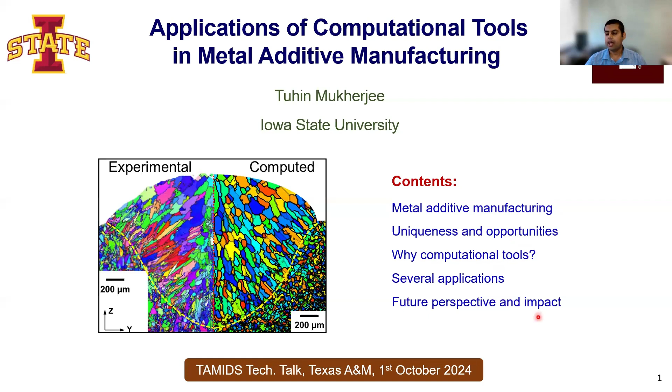Then what is the problem that we are going to talk about today? The main problem is, if you are from metallurgy, you know that there are over 5,000 commercial metallic alloys. And how many of them can we print today? You can probably count with both of your hands. That few. And why is that so? That is because we are still unable to properly control microstructure, mechanical properties, and defects of additive manufacturing parts.

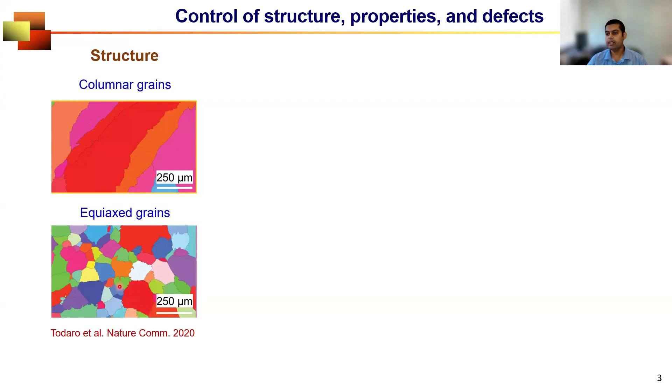So you see that depending on how you are printing, your microstructure looks different, and that will result in very different mechanical properties. In the same part, depending on the location inside the part, the mechanical property can significantly vary. For example, you see that with the distance from the top of the deposit, the hardness varies significantly, and that is also attributed to the difference in the microstructure. And finally, a wide variety of defects, starting from lack of fusion voids, porosity, cracking, surface roughness, distortion, and so forth. All of these can significantly degrade the mechanical properties, serviceability, performance, and reliability of the part.

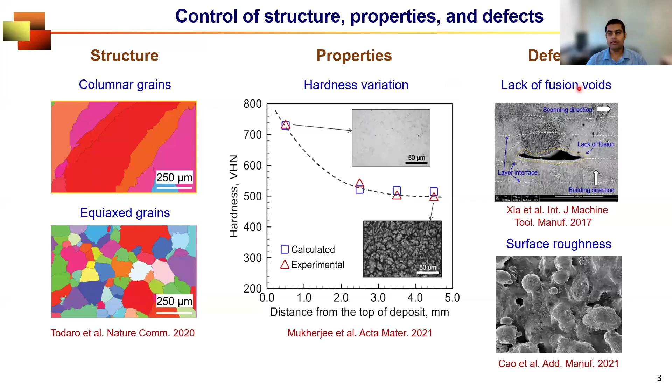And when we spend a lot of money in 3D printing a part by using $1 million expensive equipment, then we do care about our part. We don't want to print and throw that part away. So that's why controlling all of these things are really, really important. And that's where the computational tools can help us. Let me give you a quick example.

If you do metal 3D printing, these are the variables that you can adjust. Like for example, power, speed, laser beam radius, layer thickness, and there are many variables that are process conditions or properties of materials. Now, there are 12 in this list, and if you use a very simple two-factor design of experiment, the minimum number of experiments that you need to fully capture the effects of all these variables is 2 to the power 12, which is 4096 experiments.

Now, if you do 3D printing, you know how challenging 3D printing experiments are. So let's assume that you do one successful experiment a day. A PhD student cannot graduate in 10 years. So that's the issue.

And if you just take two process parameters, laser power and scanning speed, you see for the same material, the power and scanning speed vary depending on which additive manufacturing process you are using. Please note that both of them are plotted in log scale. So that means you need to explore such a wide range of processing conditions to be able to fully explore the effect of processing conditions and to understand and correlate those with microstructure, properties, and defect formation.

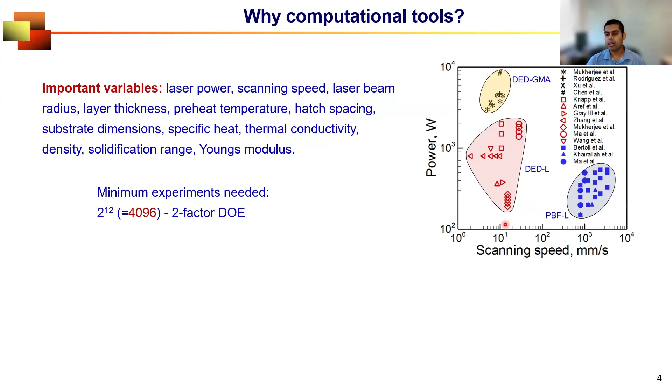To do so, we can take advantage of computational tools that can virtually test this process parameter window and reduce the parameter space for experiment. So it can tell what works and what does not work so that you don't waste material and energy and time in doing experiments that are not fruitful. In other words, it will minimize trial and error, improve quality, and at the end, reduce money.

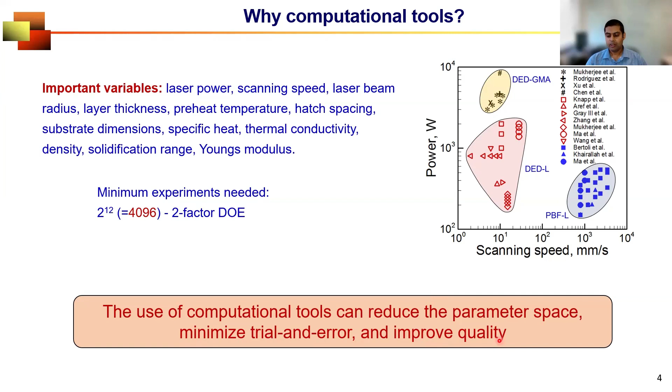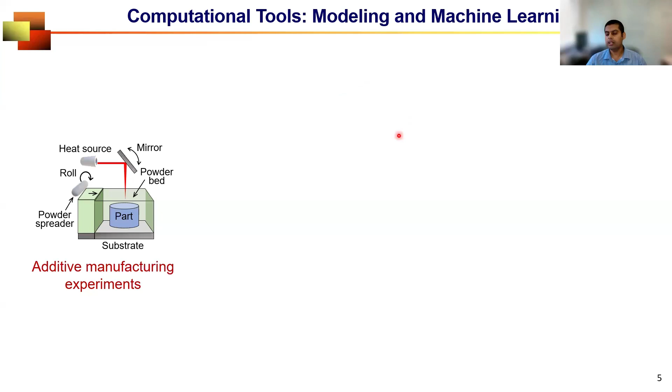So what do I mean by computational tool? It can include multiphysics modeling as well as AI tools such as machine learning and deep learning. So how do they help? Mechanistic modeling calculates the variables that affect the three things that I was talking about by providing scientific insights. And it can guide experiments by providing the appropriate conditions for which we, let's say, get a defect-free part with appropriate microstructure and properties.

But development of these models depends on proper understanding of the science behind the additive manufacturing process. Now, you know, additive manufacturing is a rapidly emerging process, and for many cases, we do not understand the physics completely. Then what we do, we take advantage of the wealth of data that we generate every time we run the model or every time we do the experiment and synthesize those using machine learning to obtain understanding that we cannot obtain

from mechanistic modeling. And these days, machine learning algorithms or deep learning algorithms have been improved so much that they can provide reliable prediction with less data. And most importantly, since we are talking about a multivariable problem, machine learning can also guide us to understand which variable is less important, which variable is more important, so that engineers can know which variable to control to be able to tune microstructure, properties, and defects.

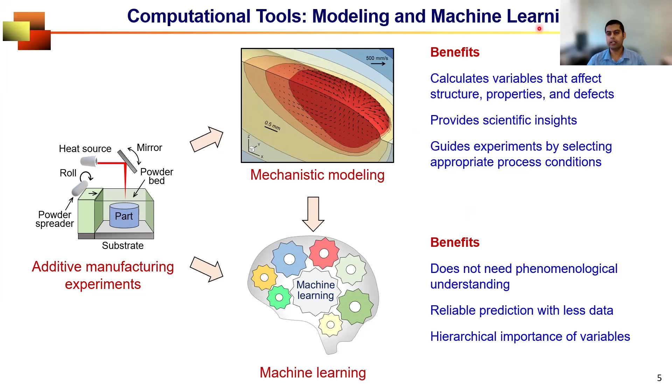So at Iowa State, we do a wide variety of things in both the domains, modeling and machine learning. So let's start talking about the modeling. The most primitive model that we do is the reduced order analytical model. It has a lot of approximations to accelerate the computational speed, but it can give us essential information on which microstructure, property, and defect depend on, like for example, the temperature distribution or the dimensions of the molten region.

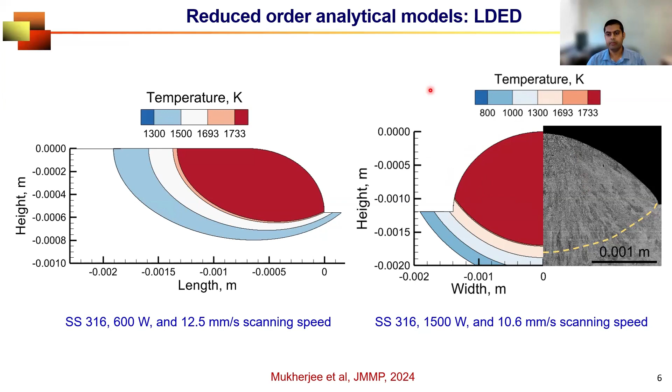This is an example of laser directed energy deposition additive manufacturing, where you see a very primitive reduced order analytical model can more or less predict the molten pool or deposit dimensions within acceptable limit. For laser powder bed fusion, and this is from a recently published paper with my student, you can see that they can capture not only the effect of process and process conditions, but the differences in the materials.

So A, B, C, and D are for 4 different materials: stainless steel, titanium alloy, nickel alloy, and aluminum alloy. And you see, depending on the differences in their thermophysical properties like density, thermal conductivity, specific heat, and so forth, they exhibit very different looking molten pool. And the temperature inside the molten pool is also quite different.

So the advantage of these types of analytical models is that they can not only provide useful insight into this process, but can also be used for comparing different alloys in terms of their fusion zone geometry, cooling rate, evolution of microstructure, susceptibility to defects, printability, and so on and so forth.

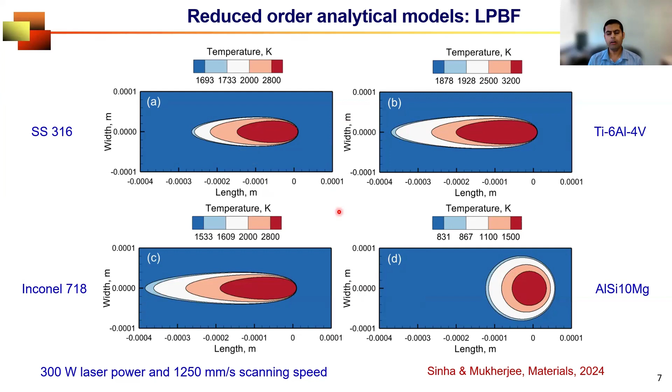Now, if we add a little more complexity and develop numerical models, why? When we need more in-depth knowledge about the additive manufacturing process. For example, when we create a molten region, how does that molten metal flow inside that region? Depending on the temperature difference, there will be differences in density and differences in surface tension. All of those drive the convective flow inside the molten region.

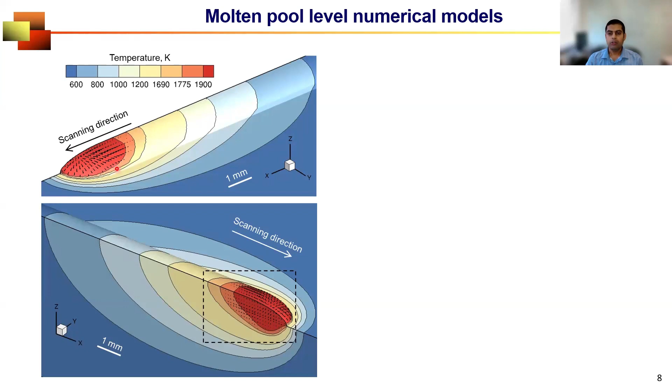And this convective flow not only affects the dimension of the molten region, but also the temperature in the nearby region, and thus the evolution of microstructure. So this type of in-depth numerical model can provide us a very detailed picture of what's happening during the additive manufacturing process. If you look at the scale bar, this is 0.5 millimeter, which means this is something like 5 millimeter long. So whatever is happening is within a very small, tiny domain. We are capturing detailed physics within that tiny domain.

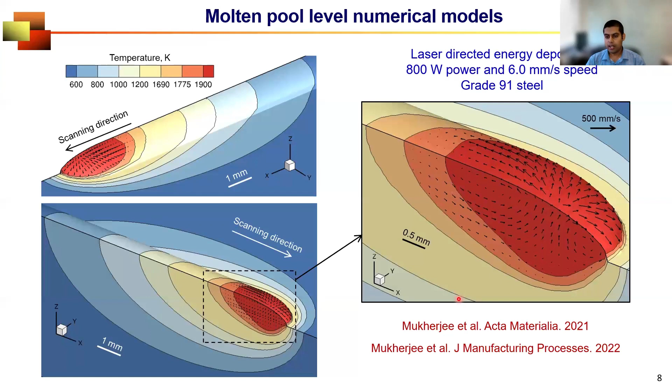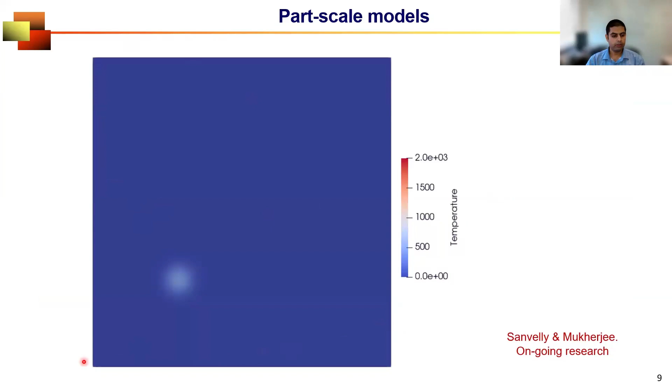Now we know that we make additive manufacturing parts by depositing many layers and many hatches, thousands of layers and hatches. So what if we want to simulate the entire part? That's often very difficult with such an in-depth model, so we develop part scale models that do not consider so much of what's happening inside the molten pool, but are much more interested in looking at the entire picture. Let me play this animation and you will understand what I'm saying.

For example, the laser beam in laser powder bed fusion is moving in a zigzag pattern. And this model is successfully capturing the variation in the temperature field happening across the entire part. So for the entire part, depending on where we are looking, we can accurately predict the temperature fields and their spatiotemporal variations.

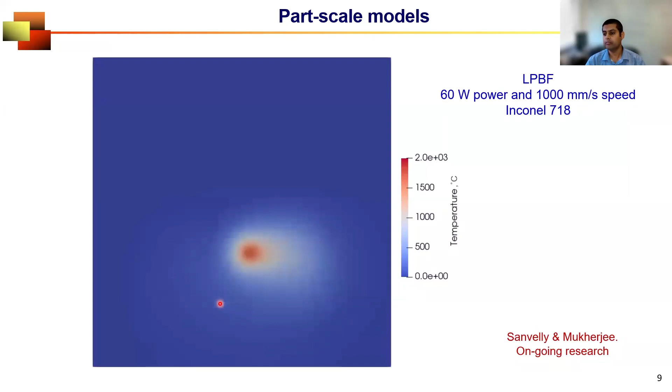This is an example of a stainless steel part made by laser directed energy deposition additive manufacturing, where the part is 40 millimeter in length and 10 millimeter in width. This part is made by thousands of layers, and there is no finite element or finite volume model that can model the deposition of the entire part. It's not possible. So that's why we need to use part scale models that are based on several approximations, but can give you the temperature fields and other essential information within a realistic acceptable limit.

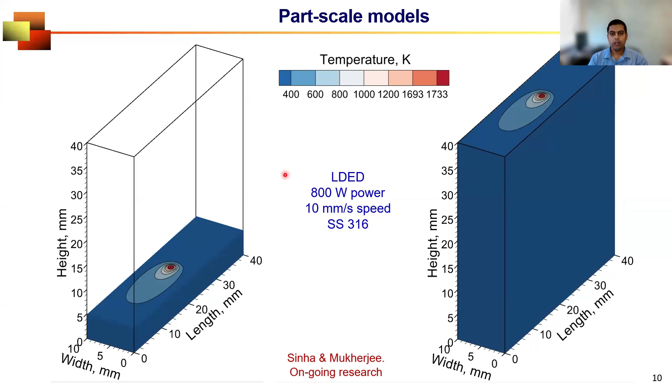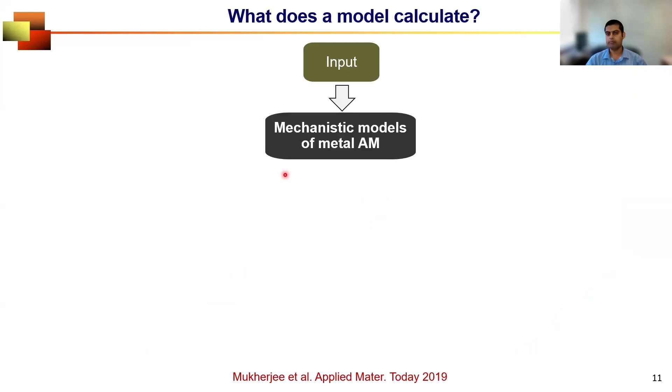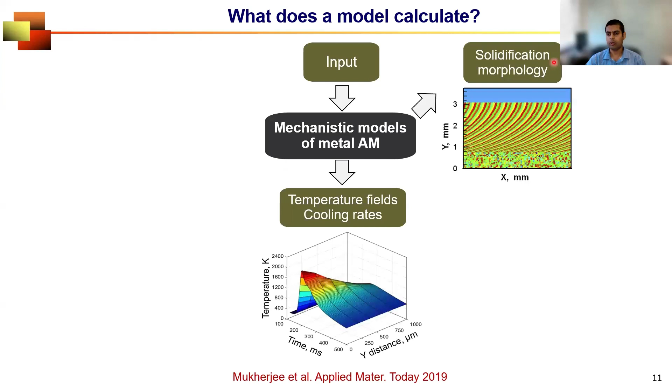So from the part scale model, if we go forward, whether this is a reduced order model, a more in-depth numerical model, or a part scale model, the main objective is to get the temperature fields and cooling rates. Once we know those, we can take advantage of that information and get solidification morphology, whether columnar grains or equiaxed grains that I was talking about, or a complete 3D grain structure, giving not only the grain size but its distribution in 3 dimensions, and also residual stresses and a wide variety of defects. This is the overall objective and the main mantra of developing a wide variety of mechanistic models for additive manufacturing processes.

Now, at the same time, if we look at where machine learning can help in additive manufacturing, to me there are two types. Like all other machine learning applications, we can classify all the problems we want to address into two classes: regression problems and classification problems. Under regression problems, the examples are control of geometry, whether we are making a larger or smaller molten region, whether the grain size is big or small because it affects properties, how much residual stress we are accumulating, and the amount of distortion in those parts. Those are regression problems where we talk about the particular value of a variable.

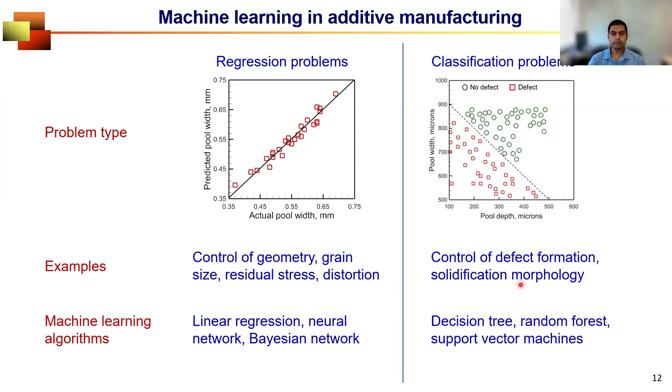So now, in subsequent slides, I'm going to give you 7 examples of the use of modeling and machine learning in additive manufacturing that we are doing at Iowa State. This example is very close to my heart, and the picture that you are seeing is actually in the building where I'm sitting in my lab. We have a wire arc additive manufacturing system, and that is controlled by a cobot or a collaborative robot.

What is the advantage and what are we doing? I'm coming to that in a minute. But what it does is it deposits material in the form of wire, which is melted by a high energy electric arc. Just like this, the electric arc is melting the metallic wire, and that is being deposited layer by layer and making the part in 3D. So this is my student wearing all the PPEs, observing very closely what's happening in real time.

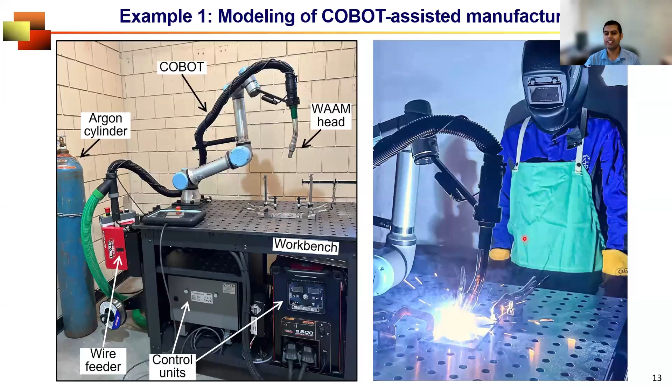So a collaborative robot or cobot is much better than a traditional robot in many cases. For example, it reduces the need for path programming, enhances the safety of human interaction, and improves user friendliness and productivity. And because of these, it's particularly useful for additive manufacturing. As my student is doing, you do not need to program this robot explicitly. Instead, you can teach this robot a path along which you want to deposit the material by selecting a few important coordinates. And then the robot itself will identify the deposition path and 3D print the entire part.

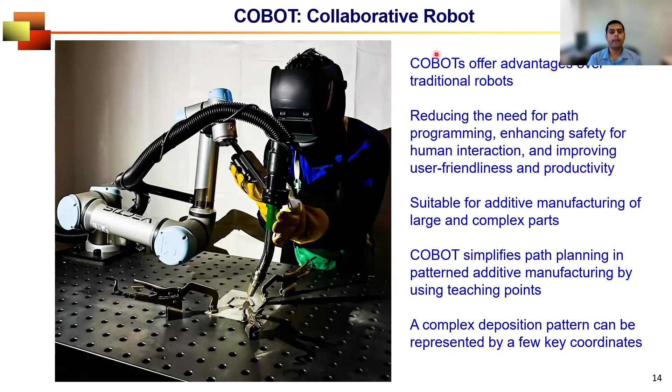So here we model the additive manufacturing process using a collaborative robot. I can give you one quick example here. We deposit the material following a hexagonal pattern, and the cobot needs to be programmed just based on the 6 vertices of this hexagon. And you can see the corresponding temperature calculation using a part scale model, the deformation calculation, and stress calculation, all using a part scale model, because here we are talking about a large length scale. And you can see that the part scale model can give you the essence of the process itself, where the stresses are accumulating the most, how the part is distorting in 3D, all those detailed information.

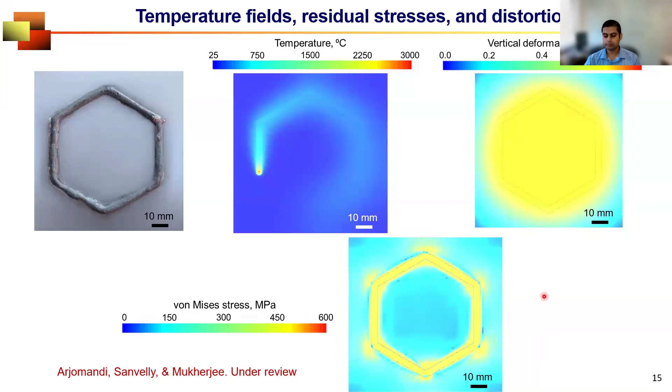The second example that I have is consistent with one of our objectives, structure, property, and defects. It's on controlling grain structure. If we go back to our metallurgy class, we are taught that during solidification of an alloy, there is a two-phase region, a solid-liquid region. So when the liquid is being solidified, not all liquid instantaneously becomes solid. There is a two-phase region, liquid and solid. If you plot the temperature in that region, you will see there are two things. One is the actual liquidus line, and the other one is the equilibrium liquidus line. And the difference between these two is called supercooling. For any solidification process to happen, there has to be a supercooling that will drive the solidification process.

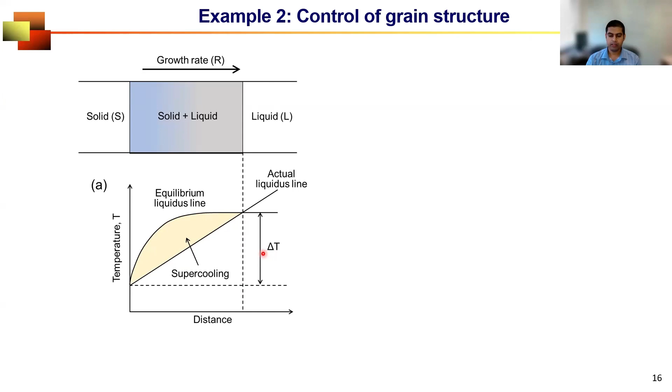This temperature difference is very important, because this temperature difference divided by distance, which is called temperature gradient, represents whether we will form columnar grains or equiaxed grains. So this is a very well-known plot from metallurgy books, where people plot this temperature gradient, which is nothing but temperature difference divided by the distance, the slope of this line, with respect to growth rate. Growth rate means how fast this solidification front is moving, the rate of solidification. Depending on the slope of this plot, you can identify how the solidification morphology will look. Whether this is planar, cellular, or, as we have talked about, columnar and equiaxed, you can very easily find out.

What you need to do is just calculate the temperature distribution that I showed you how to calculate. Once you do that, you get the temperature gradient and growth rate and readily find out your solidification morphology. Second advantage, you see along this hyperbolic line, G times R, which is temperature gradient times growth rate, is constant. And that value gives you the size of the grain. This product is called cooling rate, and that is directly connected to the size of the morphology. Now, let me give you examples of both of these.

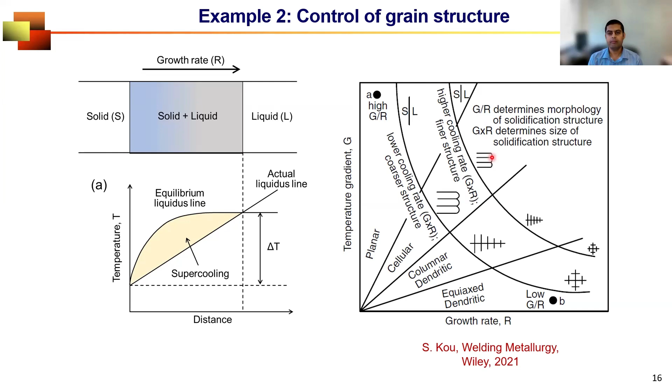Here we have used a model to calculate the G by R ratio for an aluminum alloy, a 6000 series aluminum alloy. The calculation is showing us that this G by R ratio, which is the slope of the previous plot, is varying spatially like this. For this material, there is a critical G by R value that determines whether it will form columnar grains or equiaxed grains.

For example, if the G by R ratio is more than 9, it will form columnar grains. If it is less than 9, it will form equiaxed grains. This is the computed value of G by R. In this region, the value is less than 9, and equiaxed grains should form, which is proven here from the model as well as from the experiment. Beyond which, the value is more than 9, that means columnar grain. You see long columnar grains being formed, which is also evident from the experiment.

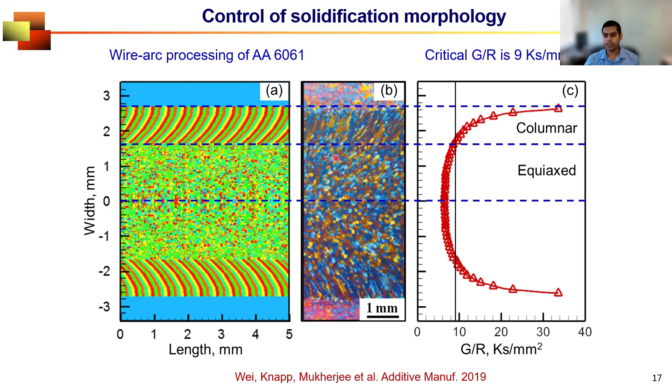So this is a very good example of how you can take advantage of temperature calculation, process it, and get useful scientific insight to be able to predict microstructure. So this is about the morphology. The next thing is about the size.

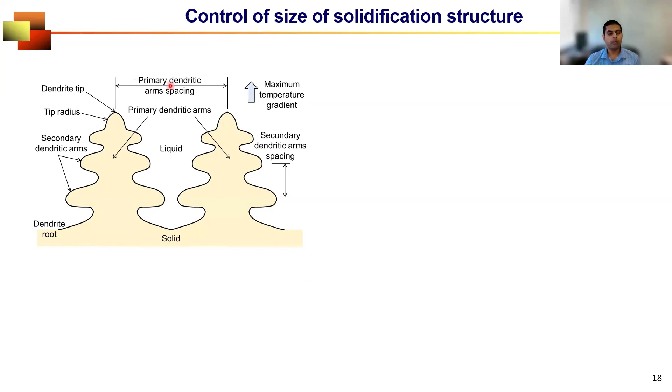Now, if I go back once again to our phase transformation class, we often talk about primary dendrites and secondary dendrites. For non-metallurgists, they look like Christmas trees, but that's how solidification happens. The distance between two consecutive primary dendrite arms or two consecutive secondary dendrite arms significantly contributes to the mechanical properties of the part. So we need to somehow predict these values. How can we do that?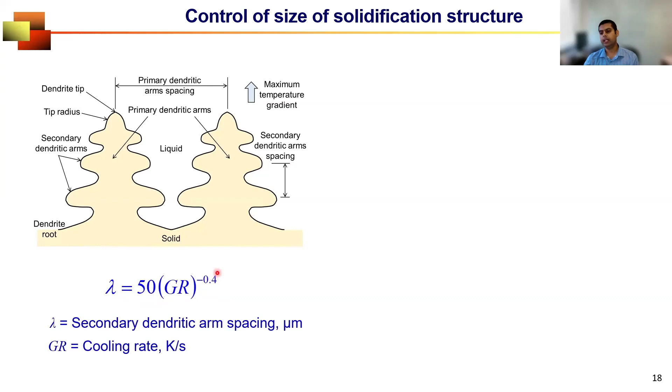Easy. From the previous calculation, we find out G times R, which is the cooling rate. And from solidification literature, like Merton Flemings' very famous solidification book, this formula comes from there. Secondary dendritic arm spacing, which is this distance, is related to the cooling rate using this formula. Now 50 and 0.4 are alloy-specific constants. For steel, this is 50 and 0.4. If you are taking aluminum alloy or nickel alloy, they might be different.

So once you have these and calculate the cooling rate from the temperature field, you can calculate secondary dendritic arm spacing. And you see here for different laser powers, I show how we can calculate the secondary dendritic arm spacing that matches with the experiment. For low power, you see smaller dendrites, and for high power, you see larger dendrites, which is very consistent with the calculated results.

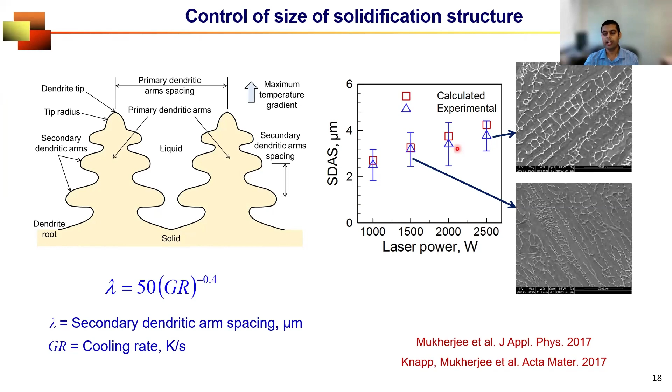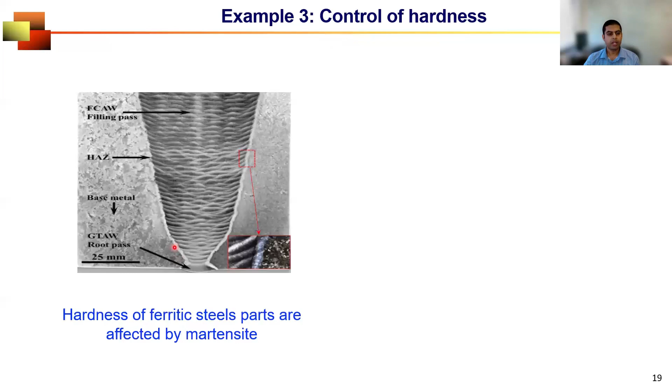So now, since we have talked about the microstructure, the next example that I selected is for controlling one of the very primitive mechanical properties, which is hardness. And the example is for a ferritic steel whose hardness is affected by martensite. Often we weld or additively manufacture this type of part by using multiple tracks. Here we are talking about a ferritic steel grade 91 that is used in the nuclear power industry.

But there is a small catch. We make additive manufacturing parts by depositing many layers. That means the layers that are already deposited will undergo repeated heating and cooling. And that repeated heating and cooling changes some of the martensite to tempered martensite. Hardness of tempered martensite is less than martensite. So depending on how many times it gets reheated and cooled, the extent of tempered martensite formation will depend on that, and hardness will accordingly change.

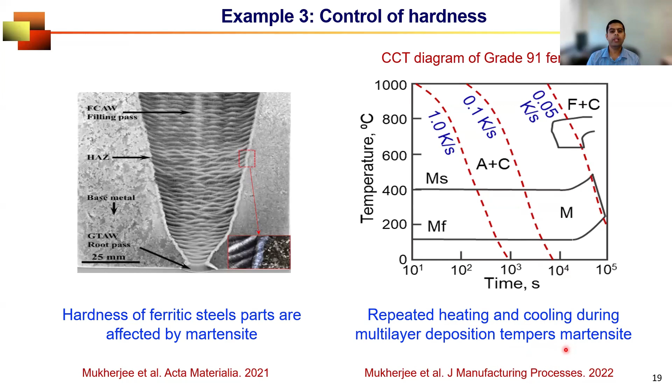So how to model that? What we did, we used the isothermal aging data. Now, for a complex material system like grade 91, it's very difficult to get reliable data on isothermal aging. So we collected a lot of data from the literature and then used those data to train a neural network, and then used that neural network to generate a lot of tempering data for different time and temperature combinations. Once we have that, we get the constants in the Johnson-Mehl-Avrami equation.

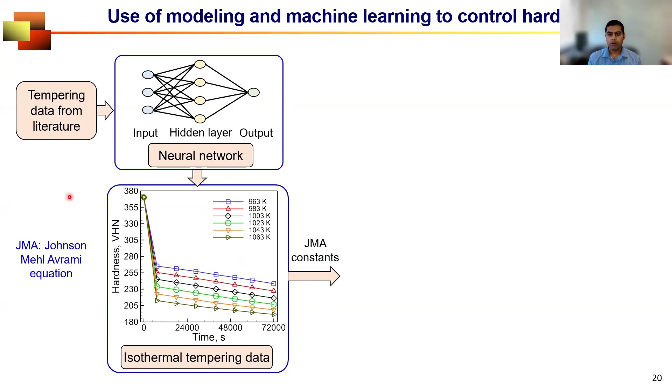What's this equation? If you don't know, it's a very famous equation for capturing isothermal phase transformation. On the other hand, the model that I was talking about can give you the temperature variations with time, multiple thermal cycles, repeated heating and cooling due to deposition of multiple layers and tracks. Now, the JMA equation is an isothermal phase transformation equation.

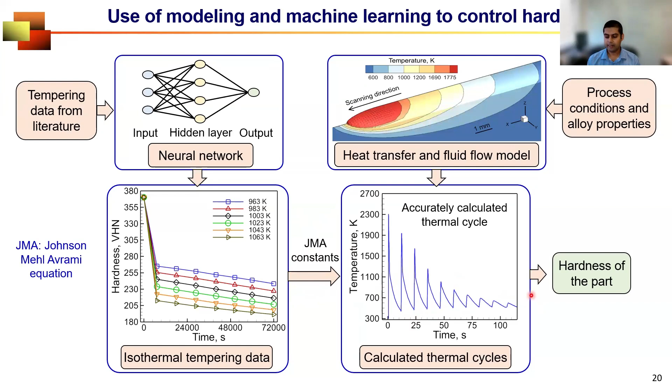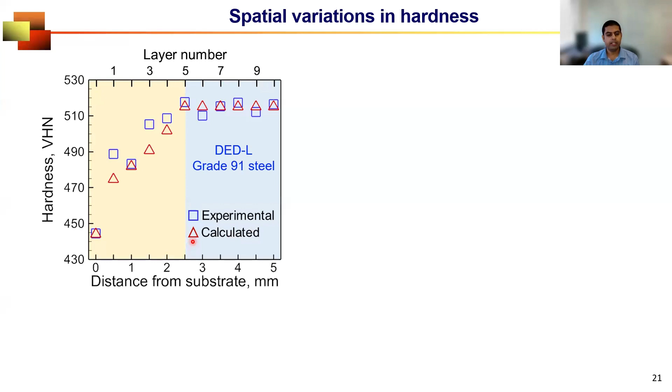What's happening in the top region? The peak temperature never goes below the AC1 temperature. So the martensite that forms here will transform again back to austenite. So this martensite will never transform into tempered martensite. That's why the hardness in this region is controlled by the absolute amount of martensite, not tempered martensite. Okay, so a very complex metallurgical phenomenon we are trying to capture by using this kind of process model.

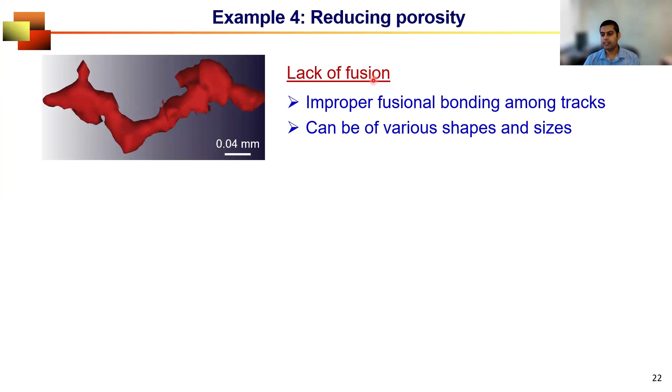So the fourth example. After structure and mechanical property, now we are going to the defects, and examples 4, 5, 6, and 7 will be focusing on defects, different types of defects. So the first one is reducing porosity. Now there are 3 different types of porosities that we encounter during the additive manufacturing process. First one is lack of fusion. What do I mean by that? We deposit multiple tracks. What if they do not properly fuse with each other? And that will end up creating a lack of fusion defect.

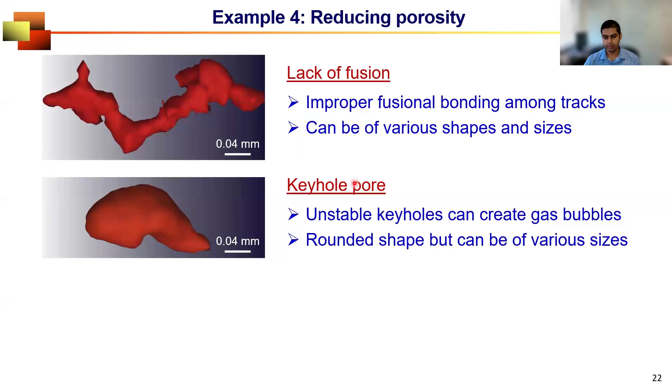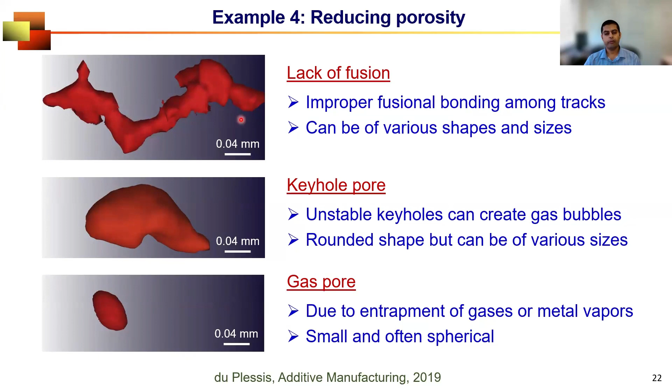Second, often we perform additive manufacturing in keyhole mode. What do I mean by that? The energy density is so high that it forms a vapor cavity during the process. And if that vapor cavity or keyhole is unstable, that will break and generate a lot of gas bubbles that will end up creating porosities. And the third one is gas porosity, where the shielding gas or metal vapor is trapped within the molten region and creates porosity. You can see they vary widely in terms of their shape, size, and morphology. So here I'm going to talk about lack of fusion and gas porosity.

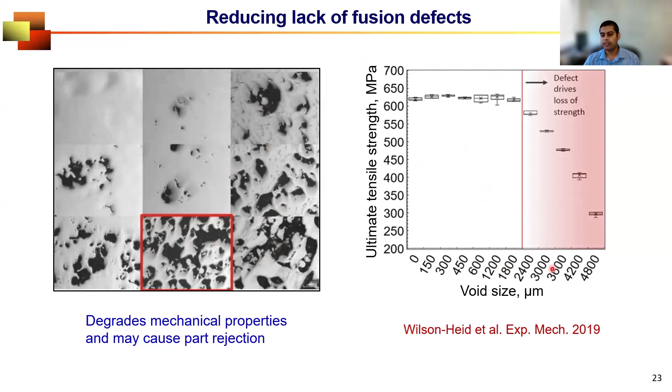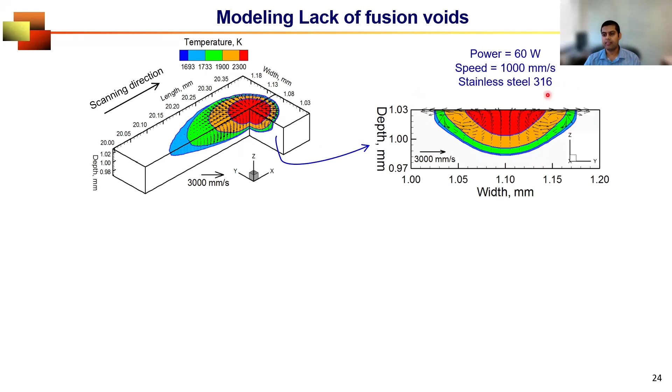So like all three types of porosity defects, lack of fusion defect, which is represented by improper fusion among tracks, significantly deteriorates the mechanical properties. As you can see, the ultimate tensile strength decreases very rapidly with the size of the void. So how do we model those? This is a typical example of the molten region, or the track. Now, if you see the transverse section of the molten region, it looks like half of a watermelon. And that is the transverse view of one particular track in additive manufacturing. Now we make a part with many such tracks, and it should look like this, where those small watermelons are just like this, a collection of many watermelons.

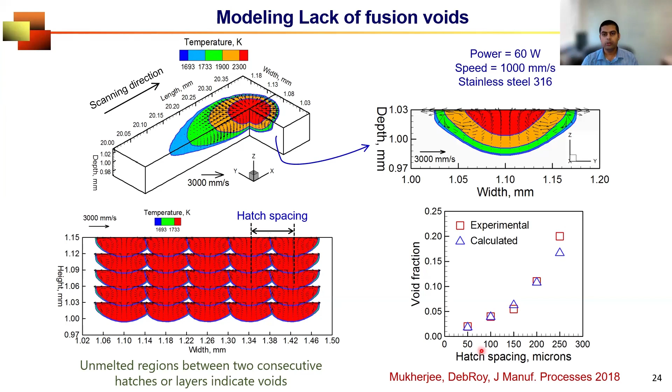So what do I mean by lack of fusion void? Lack of fusion voids are this white region, where two consecutive molten pools are not properly fused together and creating an empty region. How can you minimize this? One way to minimize is bringing them close. And that distance is called hatch spacing. That means if you reduce the hatch spacing, you should reduce the lack of fusion void, which is very consistent with the experiment. You see, void fraction is significantly less at a low hatch spacing. So like hatch spacing, there are many other variables that contribute towards lack of fusion void. And some of those are here in this list. Like hatch spacing, I have talked about. Pool size, also very important.

Marangoni number talks about the fluid flow inside the molten pool and peak temperature inside the molten pool, and Fourier's number indicates the heat transfer in the additive manufacturing process. Now, if you have all these variables calculated using an additive manufacturing model, we can even get a linear

regression model and propose an index that can delineate between the porosity cases and cases where the porosity is very less. So that's the advantage of combining modeling and machine learning, to identify very important scientific insights to be able to solve such a complex problem like porosity defect in additive manufacturing.

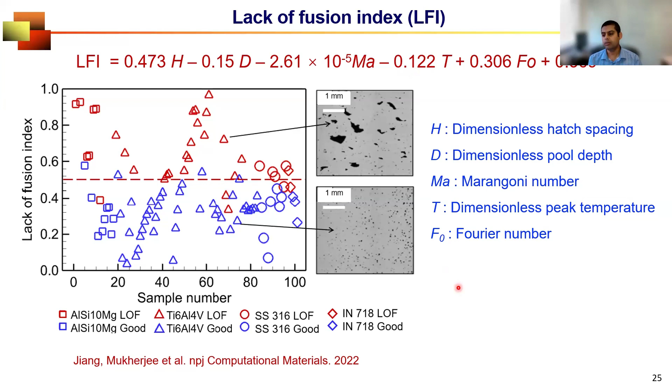Now, before it can rise up and escape from the molten pool, if the molten pool solidifies, then the bubble will be trapped and cause porosity. So the time it takes to rise up, time to rise, and the time the molten pool takes to solidify, both are important. If time to rise is significantly higher than the time to solidify, then definitely you are going to form porosity. So what we did,

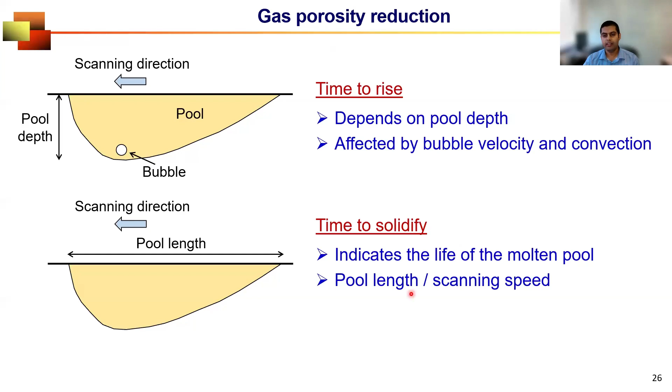we tried to calculate these two times in additive manufacturing and come up with their ratio and propose a dimensionless index. What we found, depending on the index, we can classify the cases where we see porosities and the cases where we do not see porosity. We have about 100 experimental cases for 4 different commonly used materials, and these 100 data points are collected from the literature, different papers that are available.

And we see that no matter what process parameters we are using, at the end, a simple time ratio can delineate the defect-free cases from the defective cases. And when we have defects, the index is also useful to represent the density, or 1 minus porosity, very accurately. So here, this is another great example where a simple temperature field and molten pool dimension calculation can give you very important insight to solve very important problems.

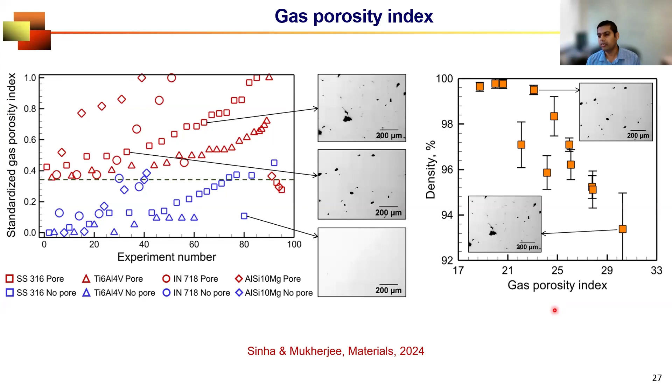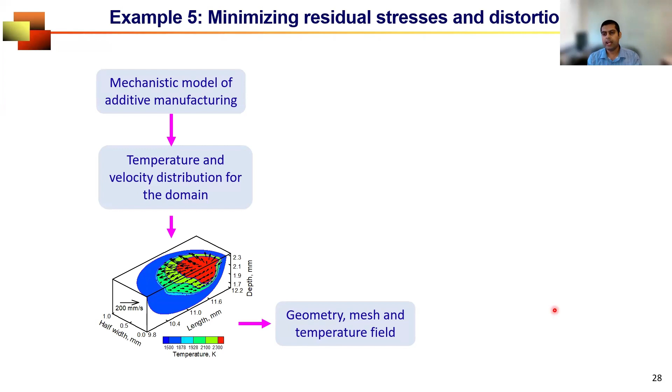Okay, the next example is minimizing residual stress and distortion. I think probably residual stress and distortion are the two most important problems in additive manufacturing, because we try to print dimensionally accurate complex parts, and we don't want our part to distort. So what we did, we start from temperature field calculation, and then take that temperature field along with the geometry and mesh to a finite element based mechanical model, and calculate residual stress and distortion.

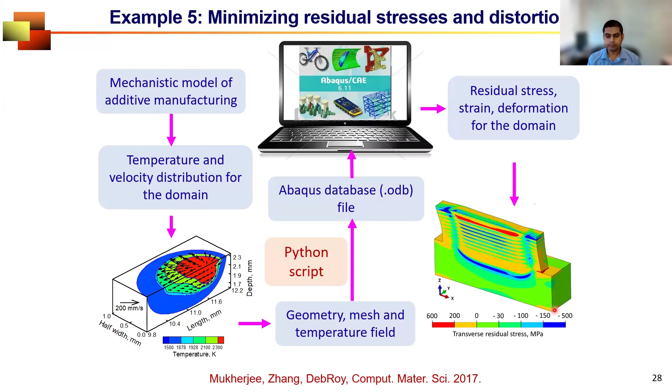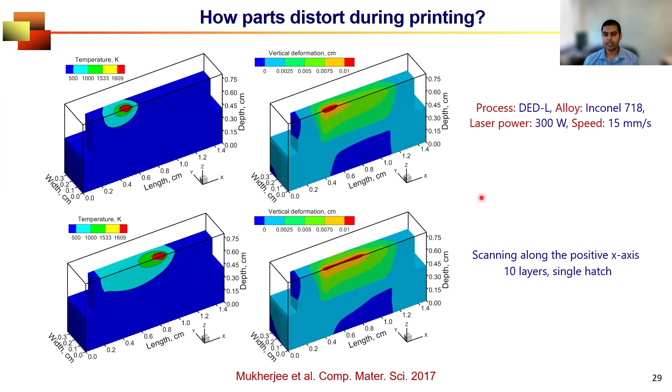So that type of modeling framework is enormously useful to provide scientific insights. For example, you see how the distortion or deformation field is evolving depending on the temperature. This is the temperature field, and this is the deformation field. You see, where the temperature is very high, the deformation is also high. Why? This is alpha delta T, high school physics. As the molten pool is progressing, this deformation field is also getting elongated. So this information is very useful to find out how much deformation you can get in the final part, and whether this is exceeding the allowable design limit.

Similarly, for residual stress, we can get the spatial distribution of residual stresses, like how the high residual stresses that are accumulated after the deposition of the second layer are partially alleviated when you deposit a subsequent layer and reheat and recool it, and how residual stress is spatially so non-uniform, causing delamination, cracking, and many other problems in additive manufacturing, and how a numerical model can capture all of those elements and guide engineers to overcome all these problems.

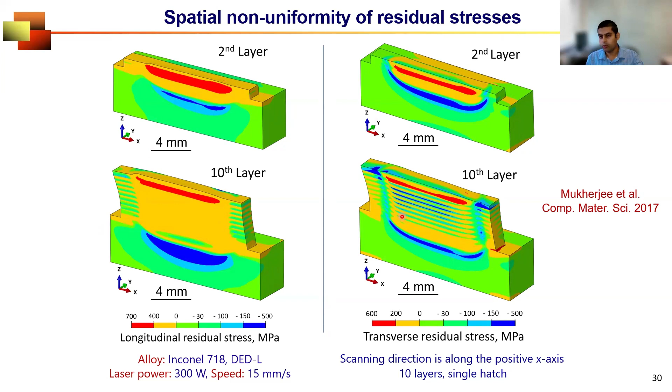Now, going back to one of the primary advantages of using machine learning, that was to identify the relative importance of important variables. What we did, we identified 5 physical factors that control or affect residual stress formation. And we created a database of 243 data points for 3 very commonly used alloys.

What we found, delta T, which is nothing but the difference between solidus and preheat temperature, is the most important variable controlling residual stress. If we go back to welding literature 40 or 50 years ago, we will see that in the welding industry, it's very common to preheat the welding plate before welding.

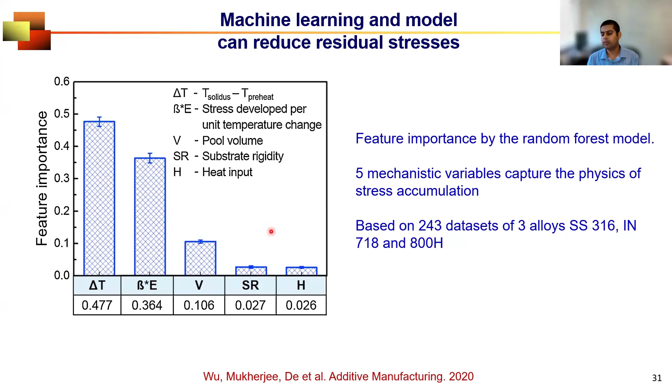What they are doing, they are increasing this T preheat to be able to minimize delta T, to minimize residual stress. So you see that using modeling result, then teaching machine learning algorithms using those modeling result, we are finding out science that are there in the welding industry for a long time. That means these computational tools are enormously advantageous to be able to give you those insights that are already proven for a long time in various industries, but at the same time, discovering new science moving forward and helping us to be able to solve important problems in metal additive manufacturing.

Sixth example. So when we do additive manufacturing, we are here talking about a high temperature process. Just imagine the molten region as your coffee cup. Water vapors, water molecules evaporate from the top surface of the coffee cup. Similar thing happens for a molten pool. The alloying elements vaporize from the molten region, and at the end, the chemical composition of the part is significantly different from the material you started with.

So this paper just became online yesterday in NPJ Computational Materials. So what we did, once again, we started from very basic temperature calculation. And then we know the vapor pressure versus temperature relation, and this is a material property. For different elements, we see different plots. It does not depend on whether additive manufacturing or welding, it's a material property. So based on this relation and calculated temperature field, we get vapor pressure distribution.

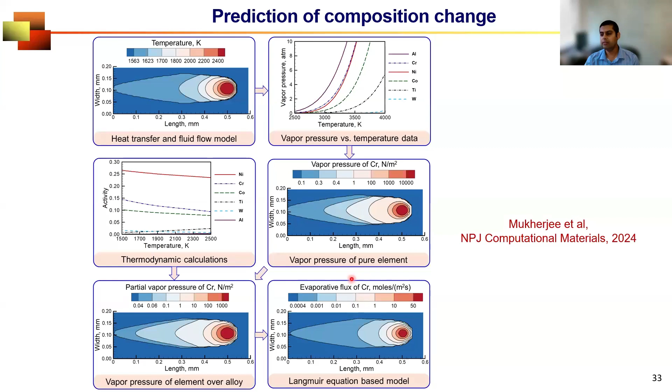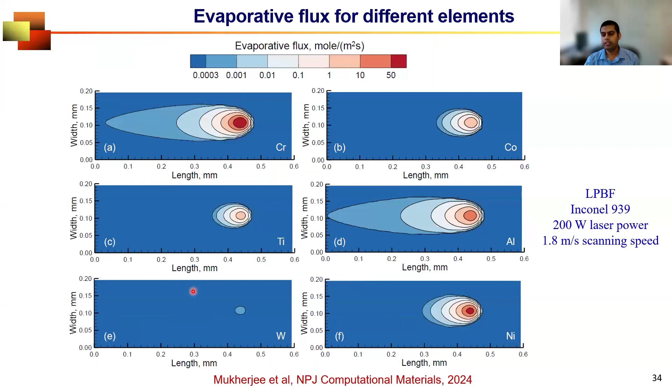And then in an alloy, we have different compositions of these alloying elements. Depending on that, they have different thermodynamic activity. So thermodynamic activity and vapor pressure give you partial vapor pressure, which is responsible for evaporation. So once we can calculate the evaporative flux of individual elements, we can calculate the final composition change. And you see, for a nickel-based superalloy that consists of many elements like chromium, cobalt, titanium, aluminum, nickel, tungsten, we can calculate their evaporative fluxes. And depending on the relative difference of evaporative fluxes, we can find out the composition change, which is very consistent with the experiments that we performed for a wide variety of elements.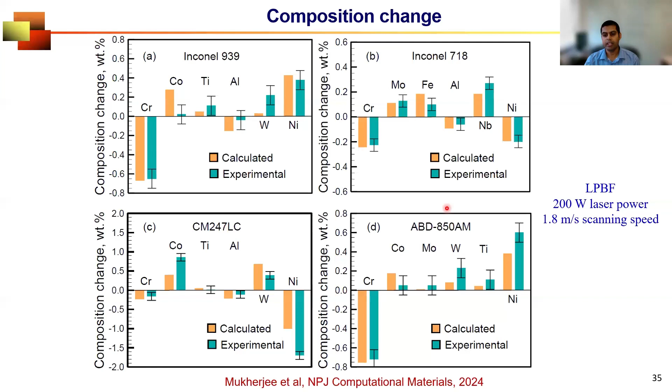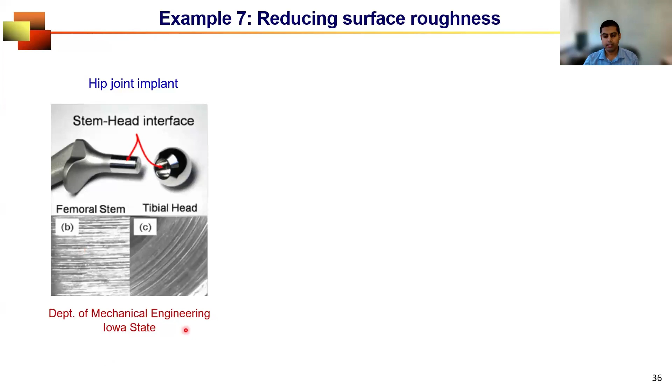So the last example that I have, and I have 10 more minutes to finish this talk. The last example that I have is reduction in surface roughness. So why is surface roughness important? See, we talk about additive manufacturing of very complex parts where dimensional tolerance is very important. Like, for example, this implant from our department, or where we talk about a bone implant that looks like this.

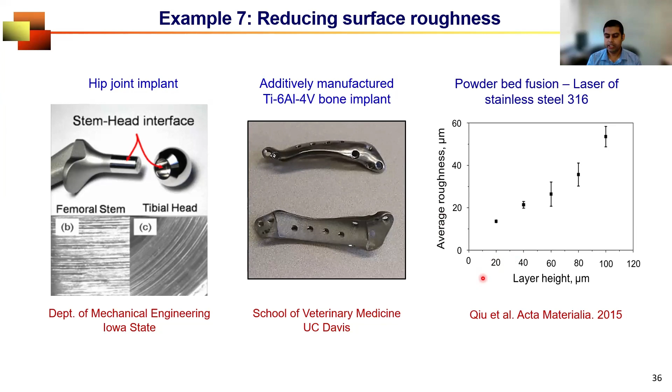So one way to achieve good surface roughness is we use very thin layers. In additive manufacturing, we use layers that are thinner than a human hair. But if you can reduce the layer thickness, even a little, then you should be able to reduce the roughness. But at the same time, if you print your part with very thin layers, you will slow down the productivity. It will take more time. So there has to be a trade-off. And to achieve that trade-off, we need modeling and machine learning.

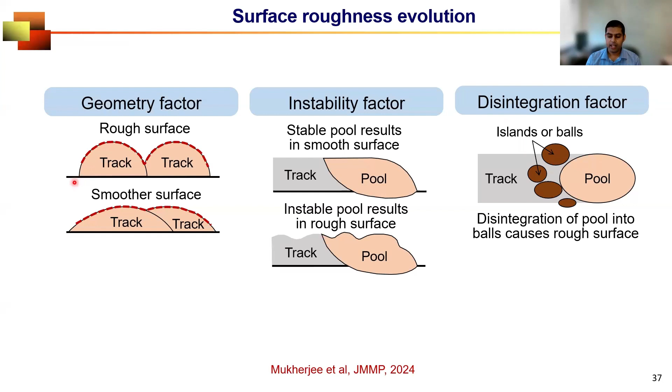What we did, we identified scientifically why surface roughness forms. And we came up with 3 different factors. A geometric factor that talks about how the tracks are deposited, an instability factor, whether the molten pool is continuous or discontinuous, and then whether the molten pool will be uniform or disintegrated into small balls and create surface roughness. So all these things we calculated, and in parallel we also measured the surface roughness using a surface measurement method on this campus.

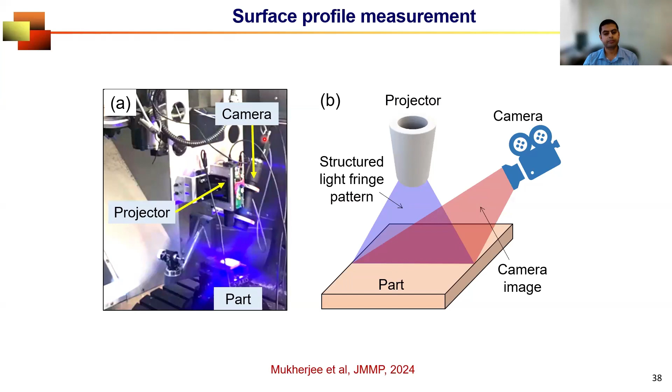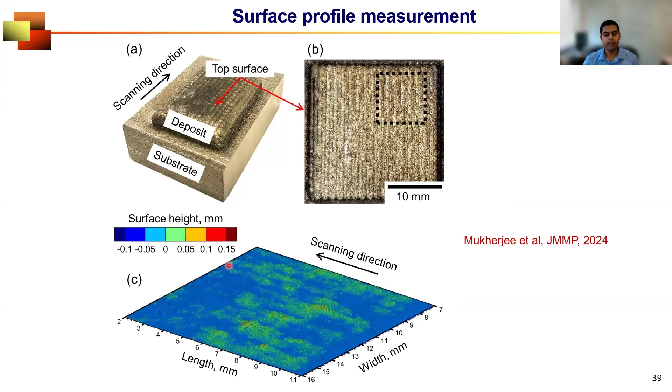And then we got the entire picture of the surface profile representing the surface roughness. So this is the printed part. This is the top surface. And within this region, we did the surface measurement using optical scanning to get the surface topography. Now, this surface topography data was correlated with the index that we proposed, the dimensionless surface quality number, based on those three scientific factors. And you see, we can very accurately come up with a process map that will guide engineers on how rough the surfaces will be.

For example, here on the x-axis we have heat input, and on the y-axis powder mass flow rate. So if we deposit for the same heat input, if we deposit more powder, the surface is going to be rough, very intuitive. Or if we have the same mass deposition rate and we increase the heat input, we are going to create non-uniformity and increase the surface roughness. So a higher number in surface quality number represents a rougher surface.

Two experimental cases, B and C. C has a higher surface quality number, creating a rougher surface. So this is an example of how you can use modeling, and these results are coming from a reduced order model. So these calculations are very rapid, but still able to give you some understanding of the surface roughness and how to control those.

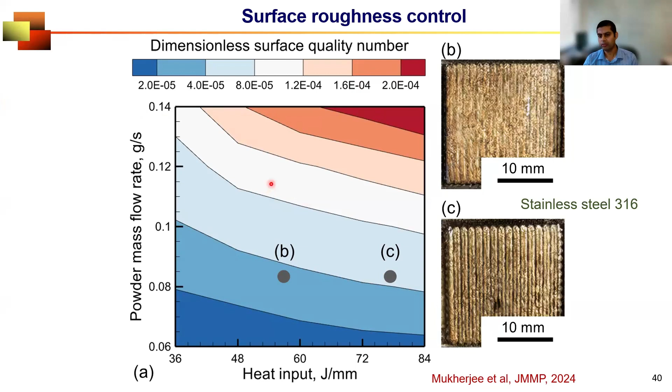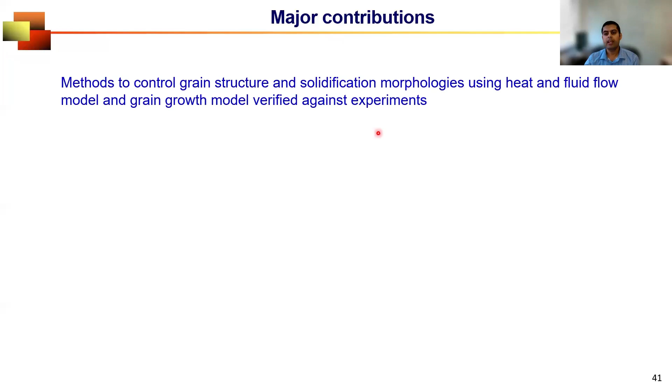So closing the deal, what are the major contributions of using modeling alone, machine learning alone, or sometimes combining both of them? First, we have methods to control grain structure, solidification morphologies, and other attributes of microstructure. Since we can control microstructure, we can provide insight about the spatial inhomogeneity of mechanical properties, which is a characteristic of additive manufacturing parts, and how to reduce that. And finally, we have talked about four defects, but there is no limit. We can use a similar methodology to minimize all common defects in additive manufacturing.

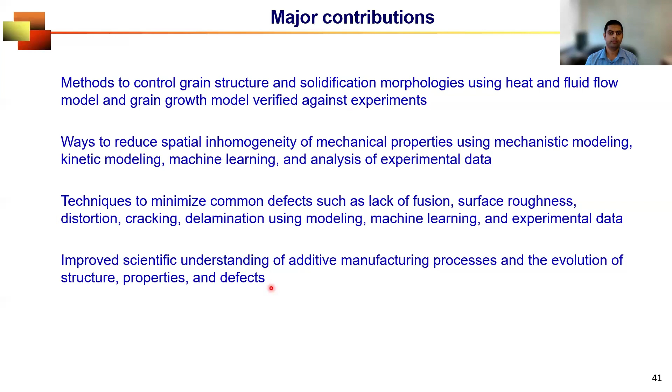So summing up, this technique of using computational tools can not only provide improved scientific understanding of the evolution of microstructure, properties, and defects, but also give us the method to control them. So where can we go from here? This is something that is very close to Dr. Tao's heart, digital twin. This is a very primitive idea of a digital twin we proposed five years ago, of how a digital twin of additive manufacturing can look.

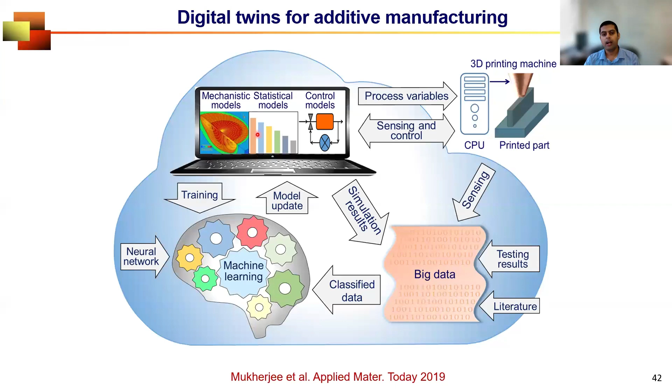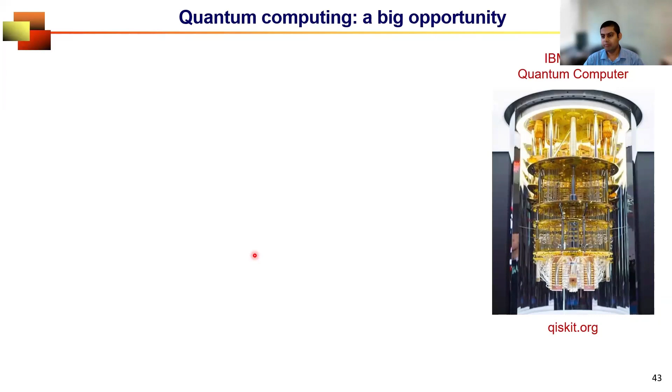Now across the world, we are still making the building blocks, but we are yet to make a fully working digital twin that can solve all problems of additive manufacturing in terms of microstructure, properties, and defects. But you can see the building blocks that we are talking about, like the computational tools, mechanistic models, and machine learning, are integral parts of the digital twin. And the second example that I think is going to be the future is the use of quantum computing. Why? We are talking about challenging computing technologies like numerical models and part scale models. They need heavy computation. And what else can help you more than a quantum computer?

And already, if you go to this link, IBM is talking about, and I am quoting from IBM's website, that quantum computing will disrupt and redefine manufacturing. This is IBM's website. And SBIR, if you do not know, is Small Business Innovation Research in the US, which funds small business initiatives in this country, and that has also recently emphasized the importance of quantum computing in 3D printing. So these two examples are telling us that that's the future. The use of quantum computing is the future for the growth of additive manufacturing, especially when we consider the use of computational tools.